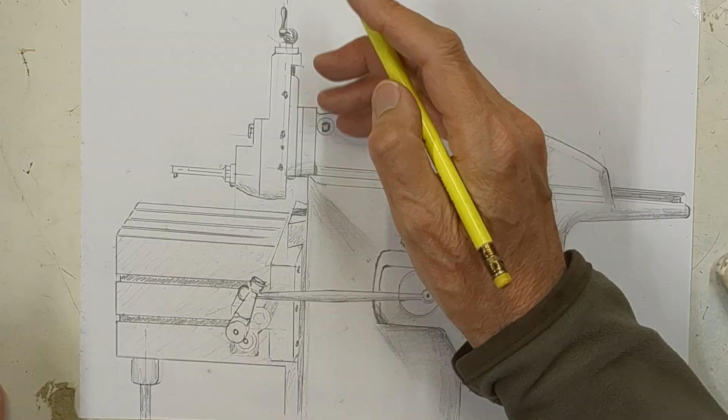I've assembled the bar in the holder. Backtracking a little, here's the clapper box, and I measured this hole and turned this to size, but it just doesn't quite go in. Could be a slight burr on the lead in, but generally if you make size on size, it's not going to be a nice fit. So I'm going to take maybe 1 thou off this and hopefully bring it to size, and hopefully this is concentric enough to do that.

Just in case I need to put this back in, I'm going to mark the position in the jaws.

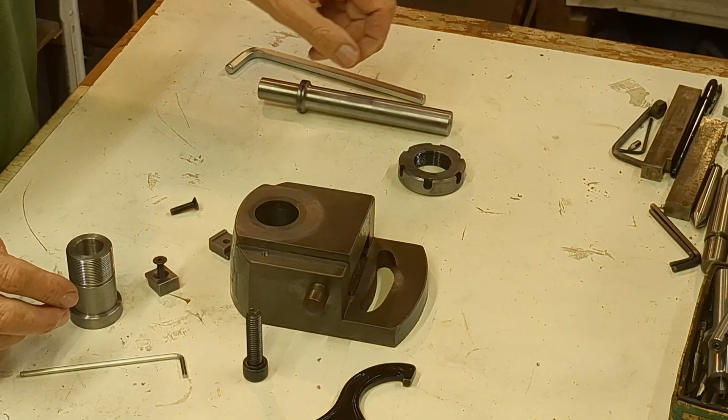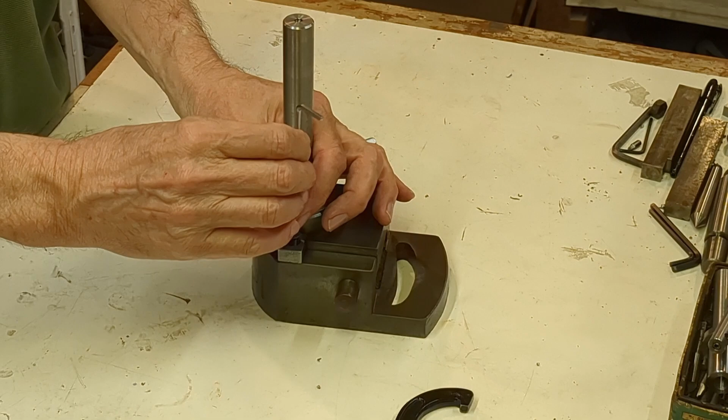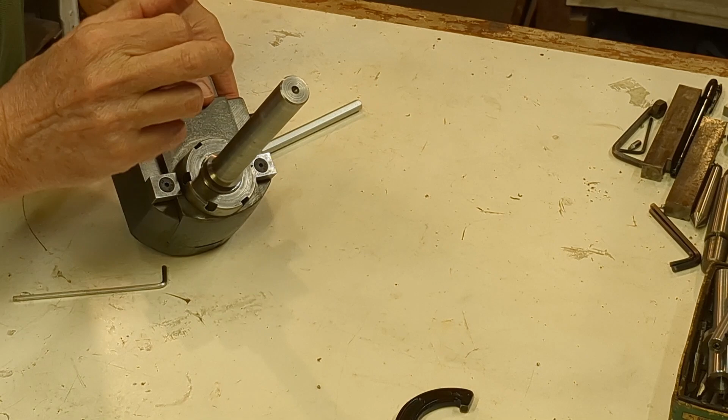In part 1 we made this holder and the nut, which comes in from the rear of the clapper box like this, and we use this C-spanner to tighten it up. Then the tool holder comes in here with a 10mm socket head cap screw from the rear, and finally these 2 clamps restrain the clapper box, because we don't want it to open. That's our setup. I still have to drill the hole for the tool bit and the set screw at the end there to lock it all up.

Now I've actually gone ahead and made a couple of smaller size tool holders. There's an intermediate one and the small one, and that small one is actually the original one I used to use, but with this adapter on the end here.

The problem is we need some kind of restraint to tighten up the 10mm socket head cap screw. This time it's actually locked up and tightened, but it doesn't always. Even if that has, I still need some kind of restraint to tighten up the large nut, and conversely to undo it conveniently. Now it's slipping, so I'm not able to easily undo the nut. So either the whole assembly slips in the clapper box, or the tool holder rotates in the holder here. I need to have some kind of restraint.

Now I've got enough material here on this 1-inch diameter flange to cut a hexagon on there, so we can put a spanner on it to restrain it. What I'm proposing is to do that on all 3, which will give me a way of locking the assembly up, rather than adding more grips and messing it all up.

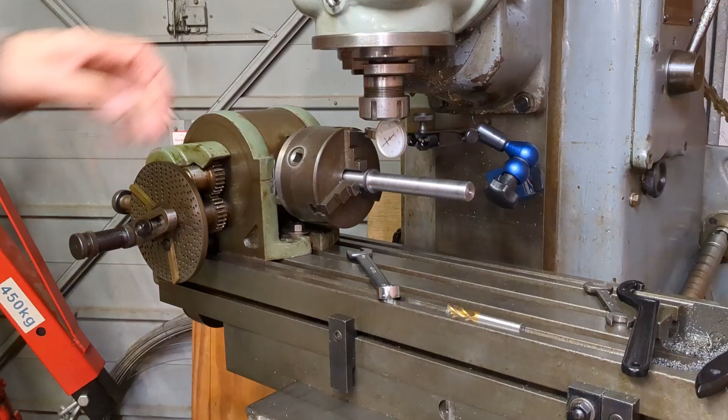This is my little 3.5-inch universal Victoria dividing head, which I got about a year ago and have used a number of times and am very happy with it. But there's one curious feature: there's no option for locking the spindle. Not that there's a lot of backlash, but I've set this DTI up on my 3-jaw chuck on one of the jaws, and we get about 1.5 thou of total backlash. I've tried it in 3 locations, and it's pretty consistent around the circumference.

Dividing that into the circumference works out at 0.044 degrees, or roughly 2.5 minutes of rotation. I don't know if that's typical or significant. I think there may be some adjustment possible on the worm wheel, but I need to look at that, and I haven't got time at the moment, but it's an interesting thought. I wonder why there's no spindle lock, and whether that degree of angular movement is excessive or not. Certainly for what I'm doing today it's not.

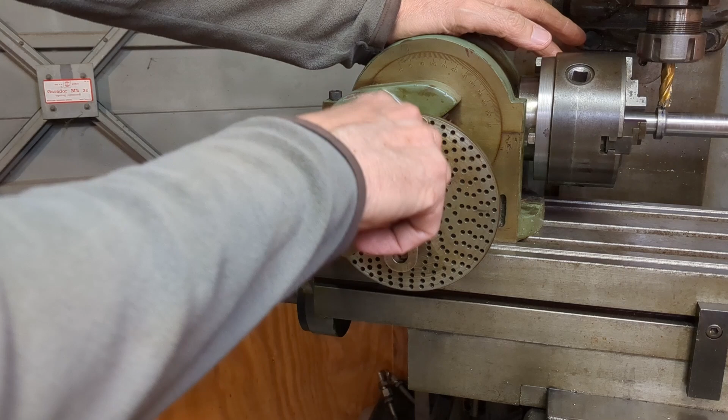The gear ratio is 40:1, so 40 revolutions of this rotates the spindle once. We're looking for 6 sides, so 40 divided by 6 gives me 6 whole turns plus 2/3. To get that, I need to make sure I've got a number of holes on my plate divisible by 3.

So I've got here 21 holes on this circumference, and I've set these up to measure out 2/3. That will be 14 holes, which is 2/3 of a revolution.

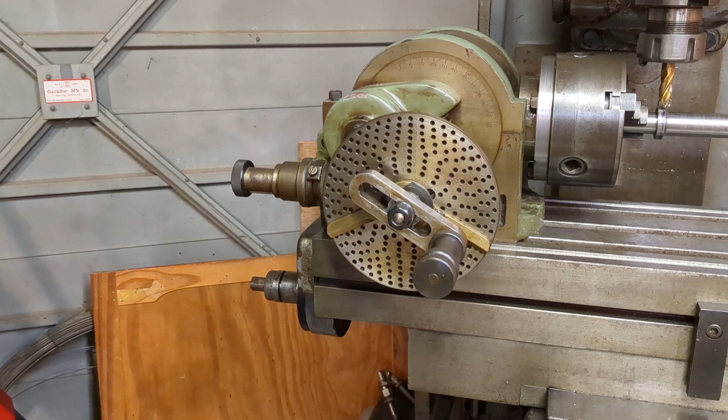So what I'll be doing is starting out here, counting 1, 2, 3, 4, 5, 6, and then 2/3. Next time I'll start from here, but before that I'll swing this around. So we'll go 1, 2, 6, and then 2/3. That will give us our 6 divisions, or 6-sided hexagon shape on the work.

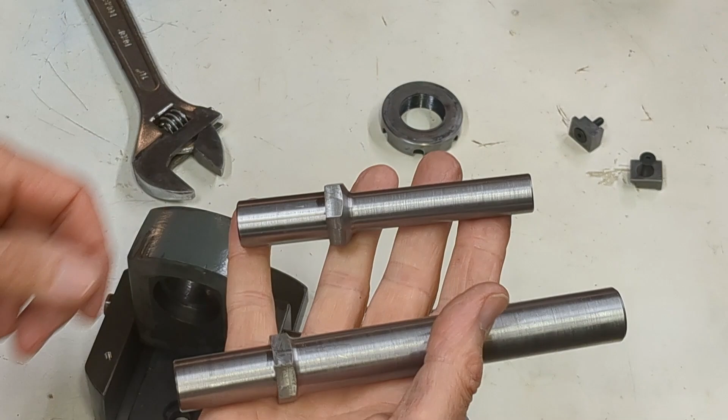So I've machined the hexagons on all 3 tool holders, but now we can assemble these.

And we can use this to tighten it up now fully. So that's that part of the job done.

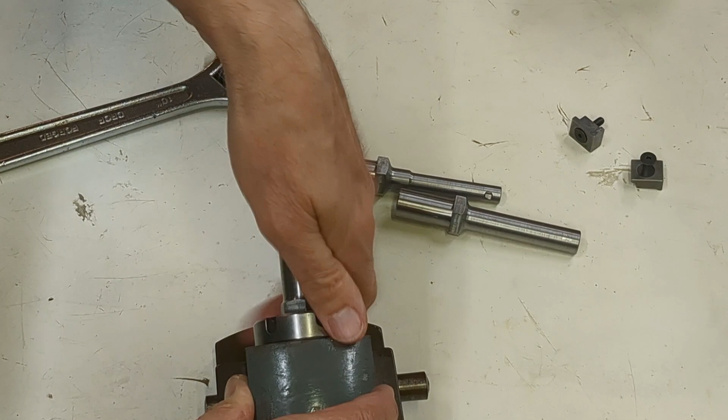Now I've discovered something else. I thought I'd be able to use either this or this to restrain the assembly while I tightened up the large nut, but I was mistaken. I thought tightening them up sufficiently to provide some restraint would mean I'd get away without any further restraint. Now sometimes it works, sometimes it doesn't.

Let's just see if I can undo this. Okay, that illustrates the point. Now here you see the whole assembly's rotating, so the friction of the tool holder in this body isn't sufficient.

Now sometimes I can restrain it like this, sometimes I can't. So what's happening now is that the tool, this is now come undone and this is still locked up. So it's very inconvenient, this.

Now let me get this apart off camera and I'll show you what I'm going to do. So what I'm proposing is using an end mill to come in there on the circumference as the center line and machine down to this flange.

This depth here, maybe slightly beyond, will simultaneously give me a radius in here and a radius in here. Take this out, and then what I want to do is open that radius out, let me explain why.

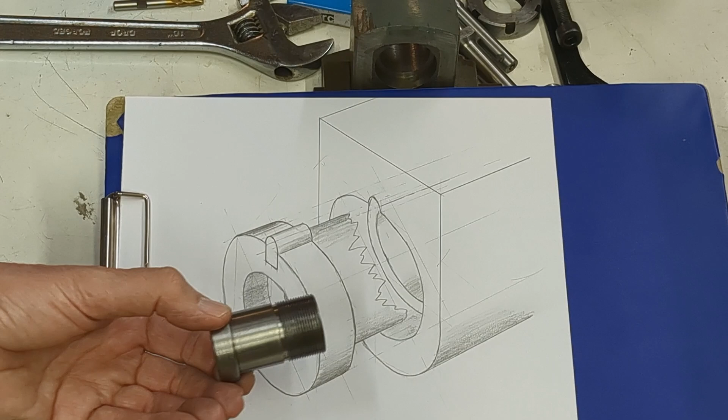Hopefully you can recognize the parts here. We've got the clapper box here, here it is in the background. We've got the holder here going in, and you can see the semicircular part of the key here, which goes in there, provides a nice locking feature.

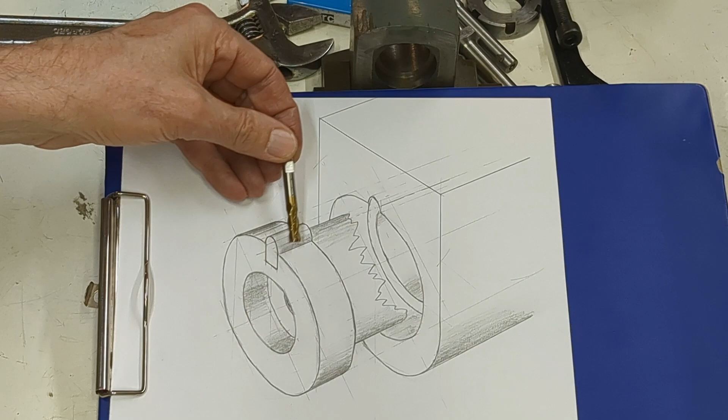I'm going to open up the semicircular feature in the circumference with the same end mill to create a square slot. The idea is it just gives me a more rigid location. So this will be a clearance, and this will be either Loctited in.

Ideally I would have silver soldered it in, but I haven't got a torch here at the moment, so I'm probably going to soft solder it in. I think that would be more than adequate. The idea is it just gives me a more rigid key.

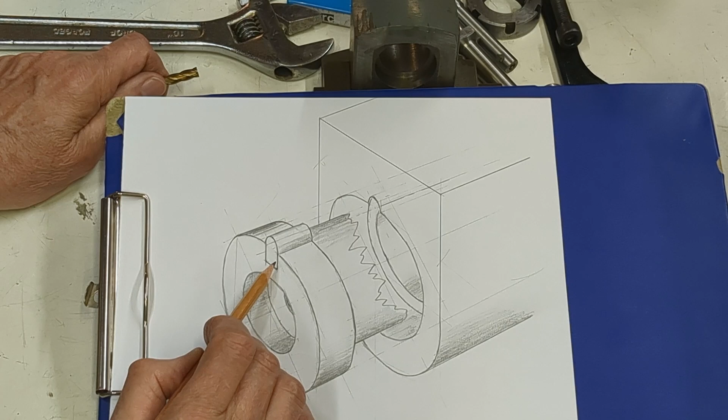It means I only have one clearance, and that's between this and the hole. Given that this is a round hole or semicircular hole, I think two semicircular holes together would have, I don't know, just mechanically it's not so good. There's a tendency for the two parts to push away.

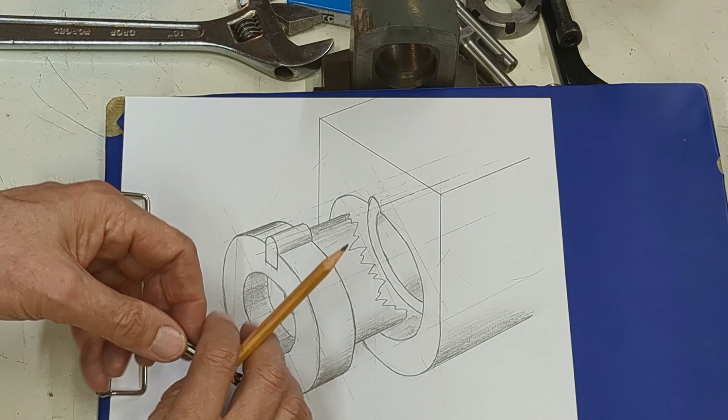This way that's minimized. So it's over to the mill to try and set this up for that operation. So this is my setup.

I've got the clapper box in my vise. I've got a couple of jacks underneath here to get it level. But before I do that, I'm just making sure it's square in this axis. So clocking up the top surface there, and then I'm going to clock up in this direction.

You may be wondering why the complicated setup. Well, that's because I didn't want to dismantle the clapper box, and in overall terms this seems to be the simplest option for me.

So I put a 5mm slot drill in. I'm just going to touch on the top of the mild steel component, the holder, and then we need to go down 9.8mm. And then afterwards I'll follow up with a 1/4 inch end mill.

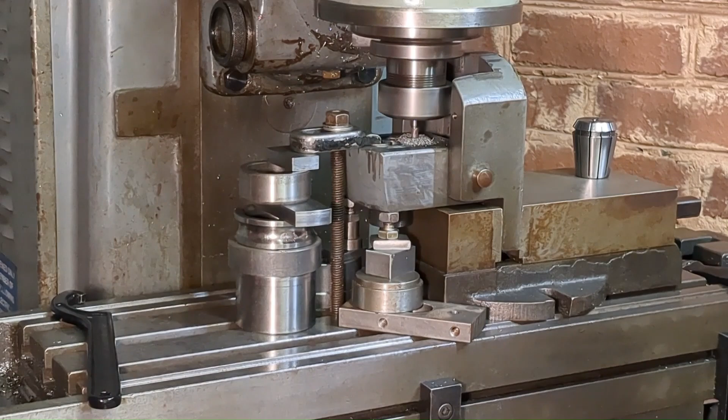So I want to just flatten out the bottom of the hole and take a cut in this direction. So to do that I've got to remove the bush.

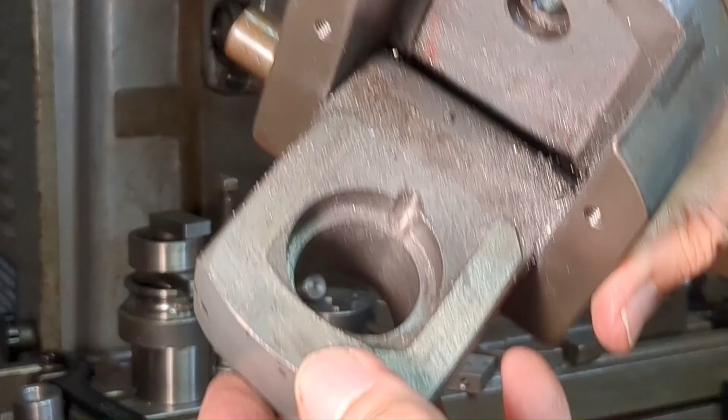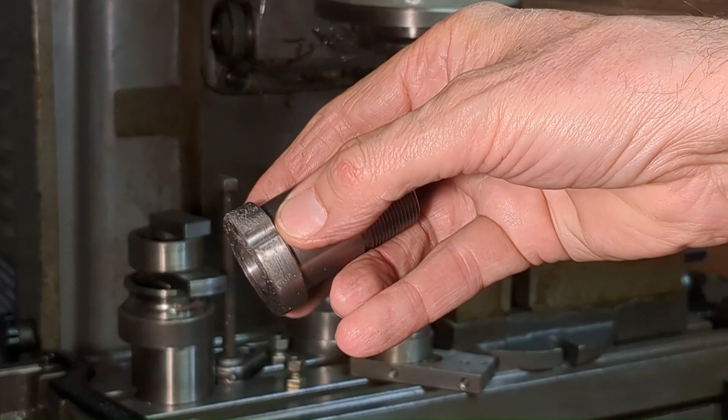So there we have our hole just below that ledge there, which is what I wanted. Then we've got the beginnings of the keyway in the tool holder. So what we need to do now is square that off and make a key.

Well, this isn't going to be critical. I just need to make sure that this is vertical. I'm going to put my rule across there, but before I do that, just make sure that the burrs are removed.

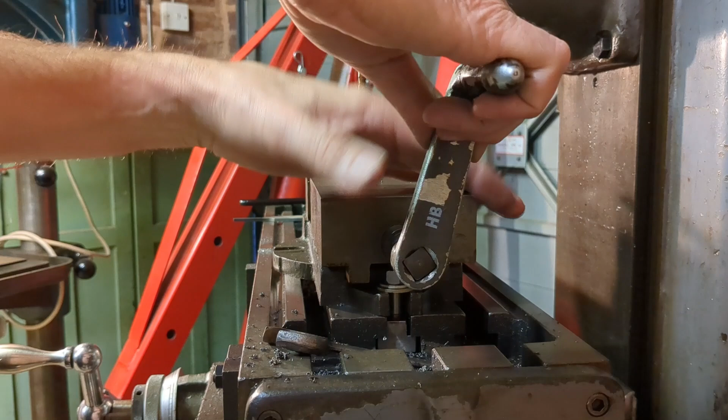Surprisingly sensitive, actually. It's certainly not worth going to a lot of trouble. I think this is going to do the trick. So I'll tighten that up now, and then what I'll do is I'll just bring the end mill down in the center of that slot and cut it to depth.

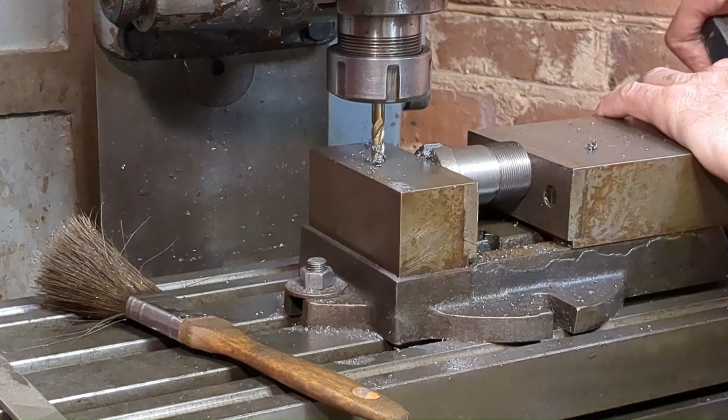So at last we've got the parts ready. This is the radius part of the key, and this is the other part, and it took a little while to make this key. It's a bit fiddly, but you can see that's a nice fit in there. In fact, there's no play that I can detect. Not that that's particularly important, but just kind of a sense of personal satisfaction, I guess.

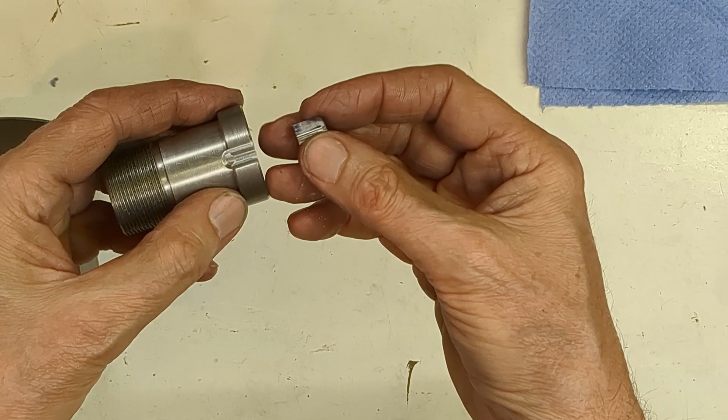So what I'm going to do now is to join these two together, the key and the tool holder. Originally I was going to soft solder them, but I think it might be better to avoid getting lead on here, just in case subsequently I do want to silver solder these together. So I'm going to clean these up and Loctite them together.

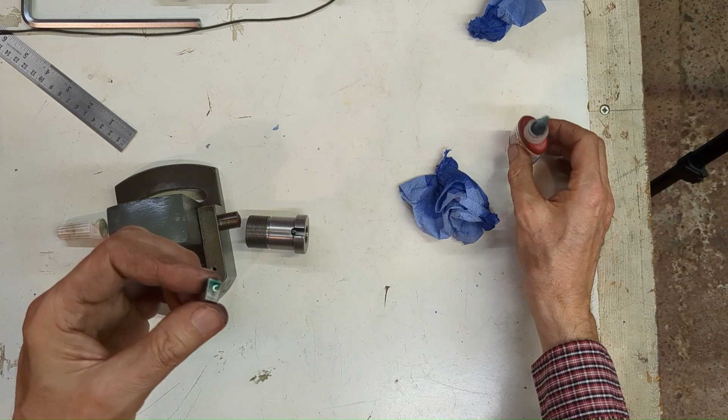Now I'm going to put the unmachined face outwards because we can tidy that up afterwards, and the machined face I'm just going to bring up just short of that shoulder so we don't have to tidy that up.

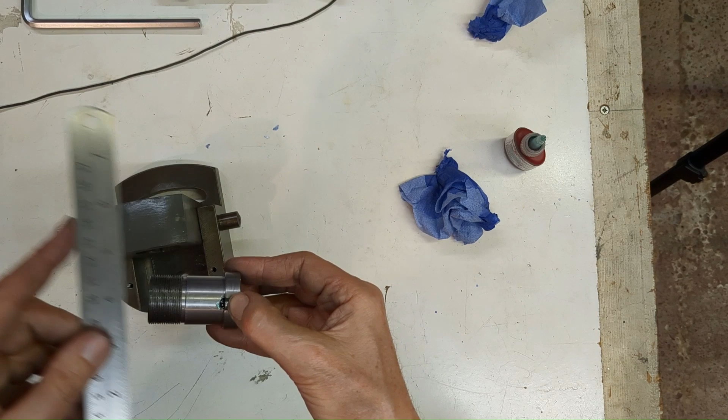So I'm finding the center of the shaft ready for center drilling the cross hole, and then I'll transfer it over to my drill to finish off, and that's because I don't have enough height on my mill.

And the medium-sized tool holder, I'm reaming here to diameter 3/16 of an inch.

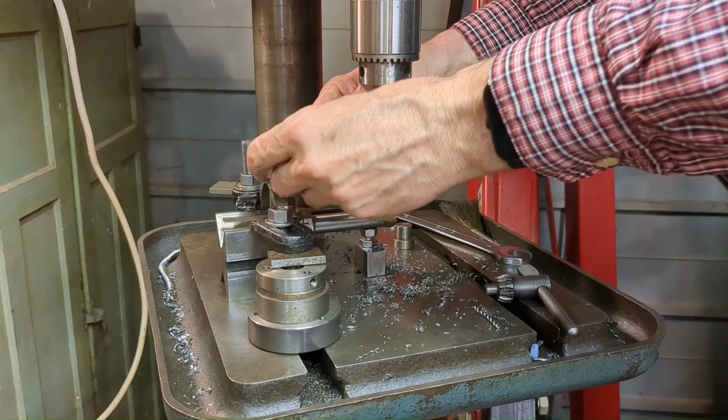And similarly, the larger tool holder I'm reaming out to suit 1/4 inch diameter tool bits.

Okay, last operation now is just to drill and tap for the set screws. This one is 5mm. The larger boring bar, this one, has a 6mm set screw.

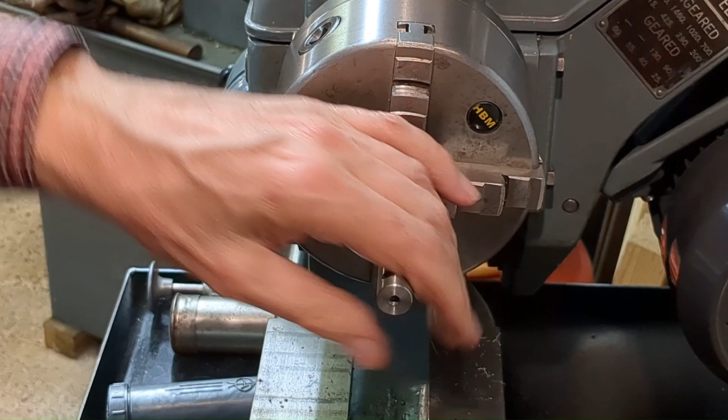So we'll just run through changing over the tool holders. So removing the regular tool holder, just like that, and then inserting the new one with lining the key up like that.

And of course, once you've set the tool up in the holder, it automatically is in the right position because of the keyway. And then finally, all we have to do is just install the 2 clamps.

And that is rigid. Of course, we've got the 2 alternative bars here for larger diameter work.

Well, that brings this series of 3 videos to completion, just in time for receiving my Colchester student lathe. I had news this week that it's due to arrive here on Monday. It's cleared customs. I'm waiting to see whether the box has been opened on the way and everything is safe.